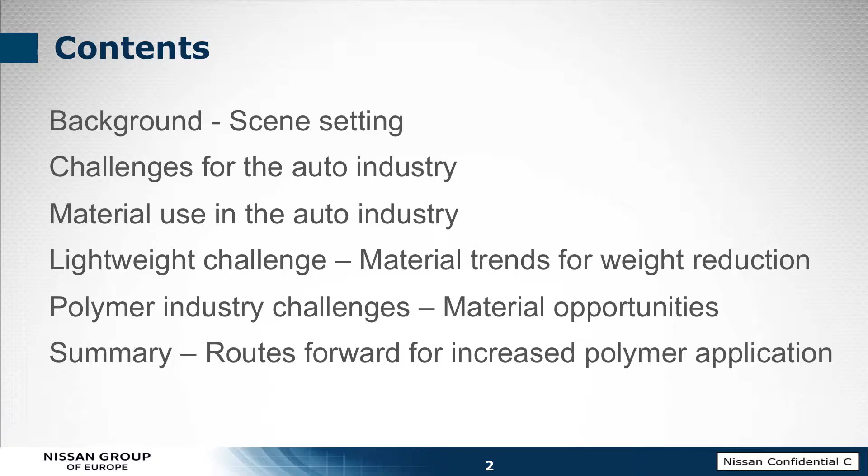The main focus of the presentation will be how we can work together, what are the challenges for the polymer industry, and what opportunities there are to work together. And then as a final summary, a little bit of crystal ball gazing and predictions as to where we may be moving to and what the opportunities are for increasing polymer application.

Now, a little scene setting. I don't want to go into too much detail over corporate strategy, but basically to keep my boss happy, just to give you a little feedback regarding Nissan and where we are. We're basically a global player now, and although we are Japanese in origin, our business is all around the world, and we have production sites in most major countries around the world.

As probably most people are aware, we have a very strong partnership and alliance with Renault. This was founded back in 1999, and it's been one of the most successful in the automotive industry, indeed in all industries put together. We work very closely with our Renault colleagues, and I'll announce shortly we've expanded this alliance a little further, so we're hoping to follow the role model we put in place with the alliance and take it some steps further forwards. One of the biggest benefits from our activity is our combined purchasing function.

Similar to what Ian was saying about our purchasing strategy and direction, this is across 3 organizations now to get volume benefits and standardization of materials. This helps us drive out the cost of our product, but also benefits us at the end of life of the product for recycling, because we have more standard materials and the industry can assist us to recycle and reprocess those materials more easily.

So basically onto the challenges for the auto industry. What are the issues that's going to be facing us? Basically the changing use requirements - we're no longer car manufacturers, we're suppliers of personal mobility solutions. As Ian mentioned, there are a lot of changes with the customer base that we are going to be facing.

Connected car and autonomous drive is going to make huge differences.

One of the big challenges we're going to be facing in the future is the availability of energy and raw materials. We're already starting to see issues with energy price rises, shortages of certain materials. This is going to be a big challenge for us. We all need to be aware of that and to be able to plan and develop vehicles to take that into account.

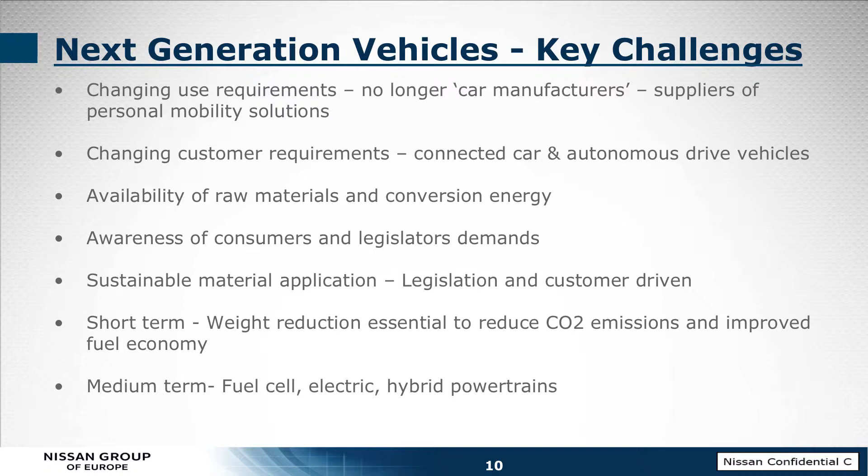Also, the requirements of our customers are considerably changing, and the legislators are applying more control over the auto industry. No doubt everyone is aware of Dieselgate and the complete swing in engine technology that's taken place over the last couple of years. But there's going to be even bigger changes.

In the short term, the main drive for us is taking the weight out of the vehicle, which I'll explain in a little bit more detail in the next couple of slides. In the medium term, it's the new powertrain systems that we're going to be applying, so fuel cell vehicles, hybrid and fully electric vehicles will be the big challenges that we're facing over the next few years.

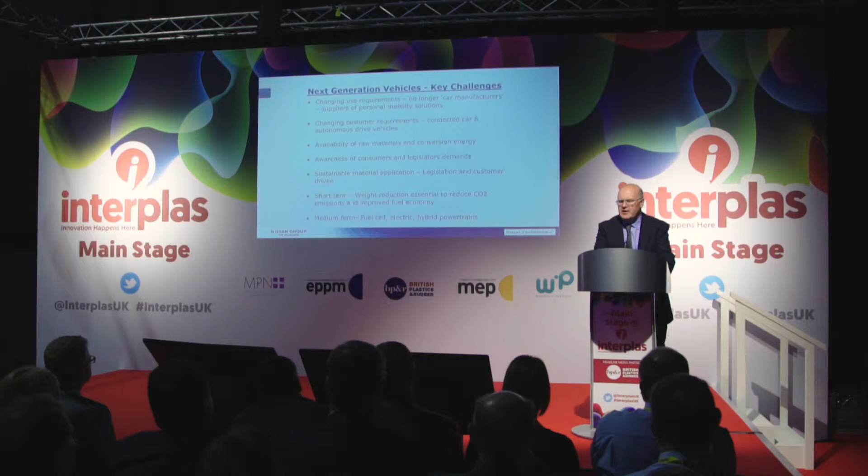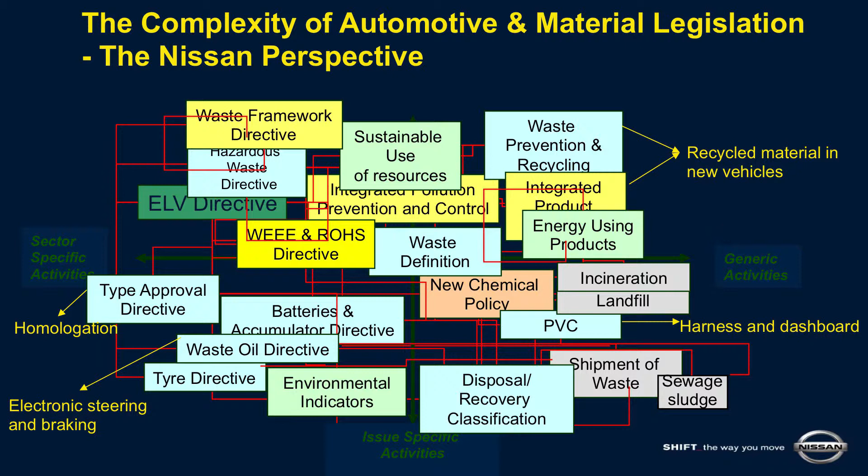I don't expect anyone to be able to read and comprehend that slide. It's purely to show you how complex the legislation is that we have to face together as the automotive and the polymer industry. We've got to meet all of these requirements to satisfy our customers and the legislators.

The big drive for us is basically the future tailpipe emission requirement, 95 grams per kilometre, 2020. That's not so far in future. Probably the vehicles that we're putting on the market now will still be on the market in 3 years' time. So the activities that's been driving the reduction in fuel consumption and emissions will still be there in place.

The direction we're taking is smaller engines, replacing a lot of the metal, consolidating parts, and basically moving to lighter weight solutions wherever possible and optimizing our vehicle.

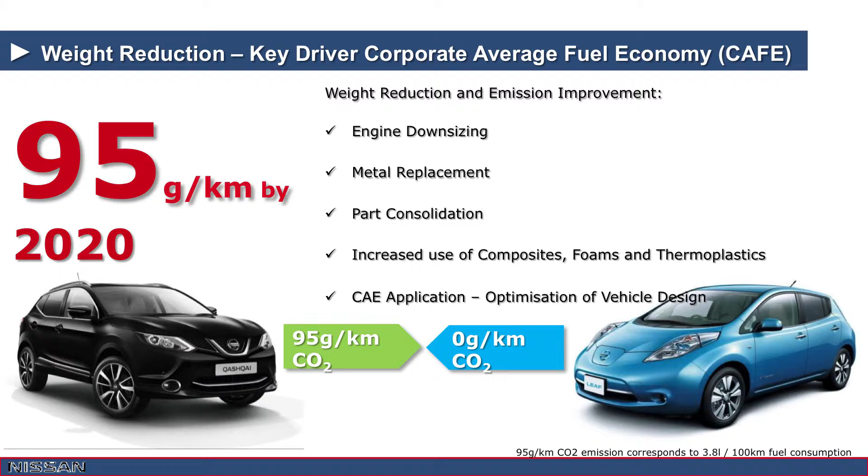Probably as you can see at the bottom of the slide, one of our Qashqai models just achieves the target. We then need a vehicle like the Leaf, which has zero emissions, to offset some of our more high performance luxury vehicles. Something like a GTR model is probably 3 times that level of emission. So we'd have to sell 3 or 4 Leafs to offset and bring that GTR down to the 95 level. So that's a huge challenge for Nissan, for the whole auto industry.

A little bit of bedside reading I would recommend for people is the Automotive Council's roadmap for the future. This maps out to 2040 the type of technologies we'll be looking at. I don't want to try and do the crystal ball gazing by myself. There are far more expert people in the industry who've contributed to that position paper, so definitely worth looking at.

Similar to what Ian said, the growth in the UK auto industry, there are very strong predictions for 25% growth over the next 3 to 4 years. So far from being a dead industry, it's a growth industry, one where everyone should be engaging and supporting.

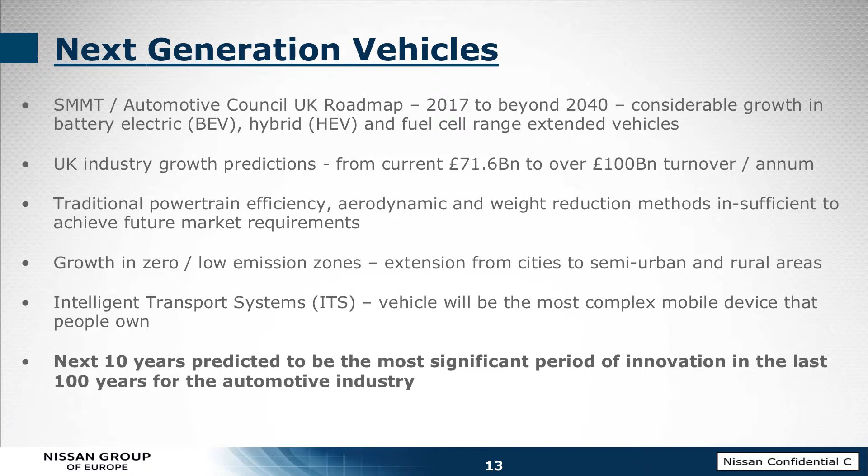In order to continue that growth, basically we need to get weight out of vehicles. We need to match the technology to our customer requirements. One of the big predictions is for the next 10 years, that will be the biggest period of innovation the auto industry has seen in the last 100 years. So the last 100 years, basically, we've seen a lot of changes. The next 10 years, huge amount more additional items.

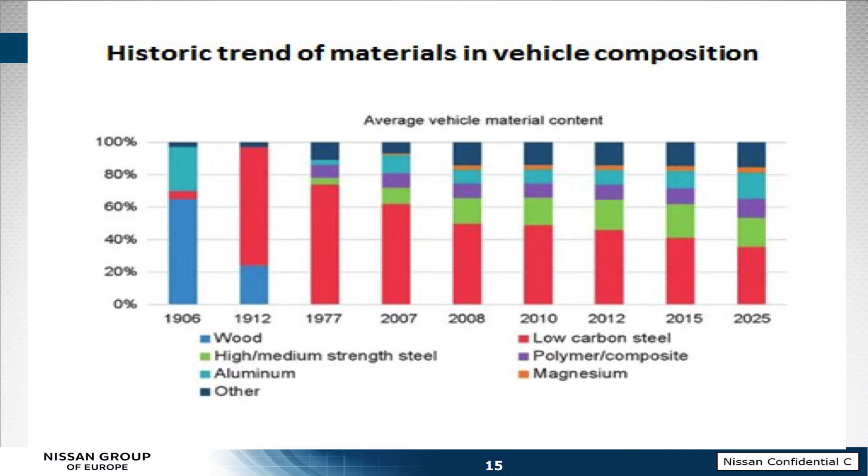Just to set a little bit of background of what materials we use, going back in history - 1900s, vehicles were essentially made out of wood, horseless carriages. As we've gone through to the 70s, a lot more steel appearing in the vehicle, basically low strength steels. Moving forwards, where we are today, there's still steel, a lot more high strength steel, a lot of aluminium alloys and metallic materials, but there is a consistent growth in polymer application.

We predict this will continue. So the polymer industry has opportunities there. The business opportunities are there for yourselves to exploit and work with us to deliver.

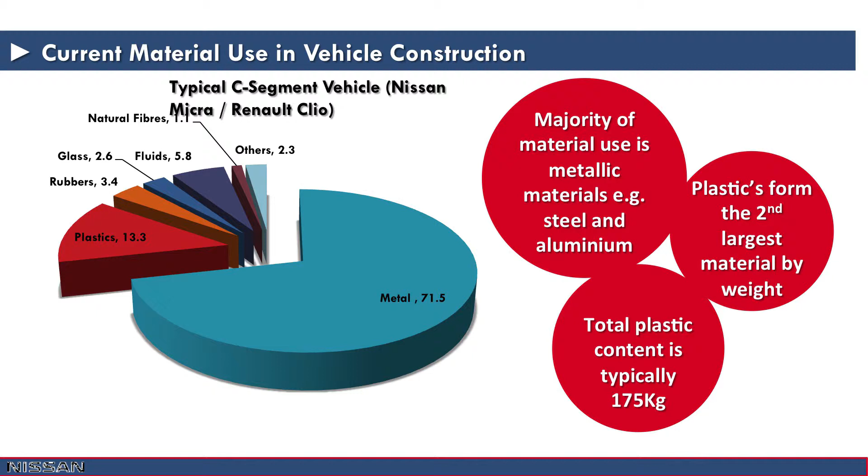We didn't compare any slides or information prior to this, so I'm relieved the figures are very similar. For a luxury model like one of JLR's and one of our more mass market products, about 70% of the vehicle is metallic in nature. The second highest proportion is plastic and elastomeric materials, typically of the order of 175 to 200 kilograms. So quite a big volume at the moment, and predicted to grow even further.

So where are we going for the future? What do we need to focus on? And what weight reduction technologies do we expect to dominate?

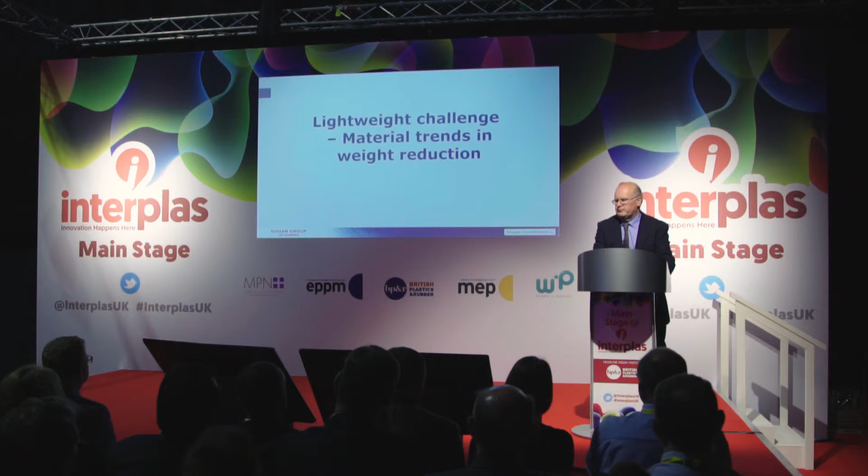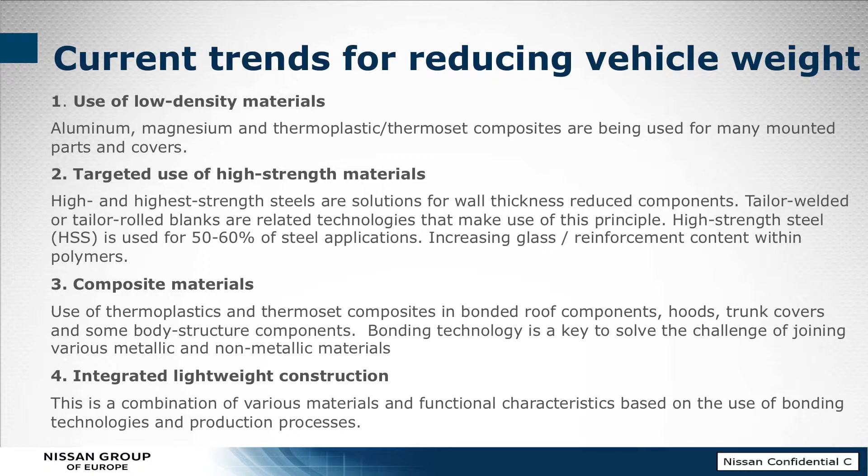Clearly the steel industry is going to fight back, as are the metallics. The aluminium industry is pushing very strongly, with more applications of lightweight aluminium for closure panels, things like bonnets and doors on vehicles. Higher strength materials are definitely a direction we're moving in for all types of materials. The steel industry has pushed ever higher strength grades. The polymer industry, we're expecting you to deliver the same technology leaps to give us better materials, higher filled levels, better strength properties.

Composites - it's been the buzzword probably for 20, 25 years. We're following the aerospace industry, trying to use composites where we can, but the technology isn't there yet for mass manufacture, mass production, and the cost level isn't there yet. But it's definitely a technology we are looking at very closely and looking to exploit.

One of the biggest drivers there is basically how you join composite panels to steel, to aluminium, because the vehicle of the future is going to be a mixture of different types of materials. And how you integrate these material combinations is going to be the secret for the success of future manufacturing and repair and use of the vehicle in the market.

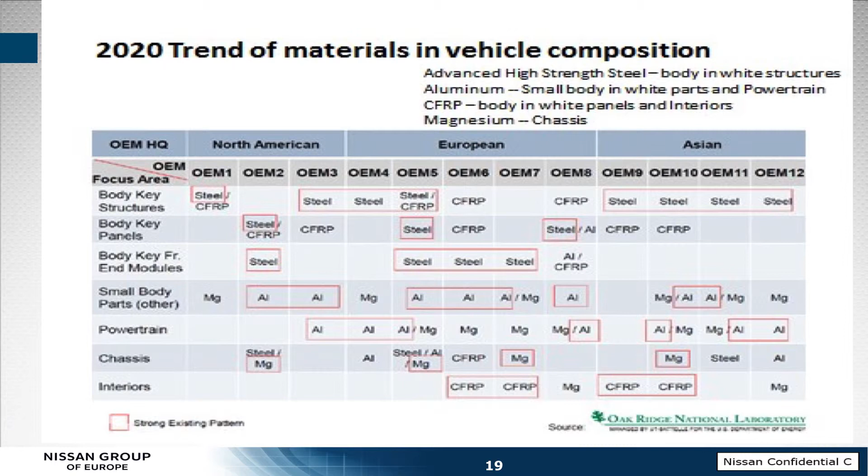Again, another slide I don't expect you to go into in a lot of detail, but it's just to highlight and contrast the differences between the Asian market, the North American market, and the European market. In Europe, there are many more material types that have been investigated and studied, and there's more opportunity here to try out different technologies, which is why we're pushing strongly many different areas of material application on our European products.

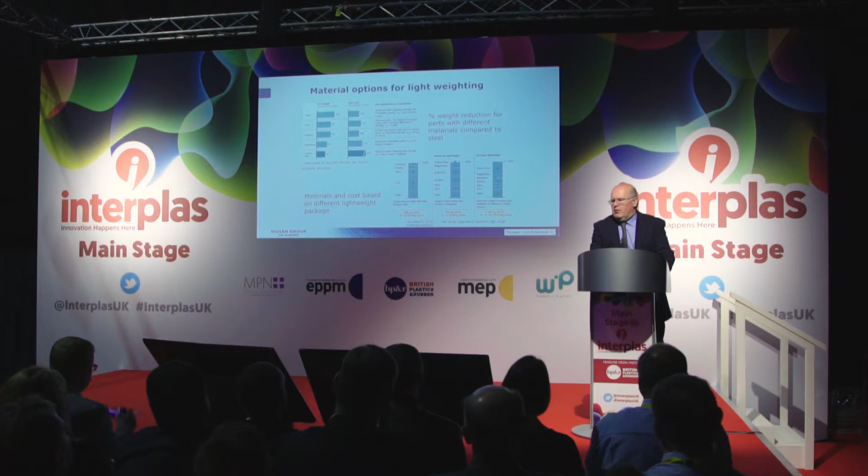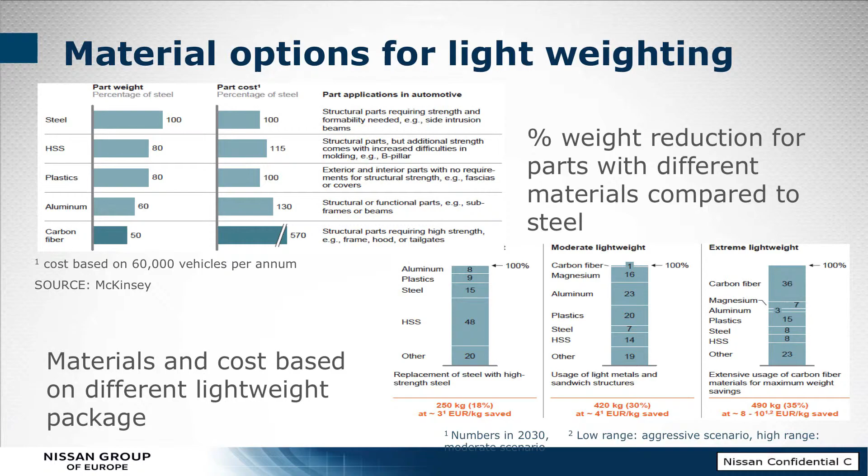Also, the type of applications of those materials and where we're applying them - for polymeric material and plastics, it's basically moved from basic interior trim parts to highly advanced engine components, crash members, crash products, and more challenges, and that's where we see the future moving. But what we need to achieve is the weight and the cost with these materials, and to be able to make everything into one lightweight package.

So what are the challenges for yourselves in the polymer industry? Where do you have an opportunity to contribute and support the OEMs for car manufacturing?

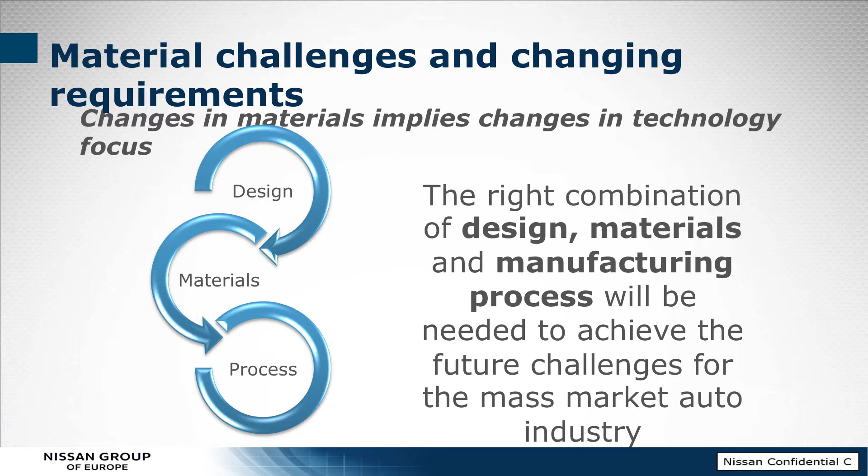Following on from a couple of the points that Ian made for JLR, we need to combine together the material, the design, and the processes. We've got to have the right material with the right design of part for the right application, and to suit our manufacturing processes. The only way we can do that is if we all work together to develop the new technologies, the new applications. The door is always open. We need to start the communication and improve it from where we are at the moment to be able to push forward. The OEM can make several suggestions and pointers, but it's everyone working together that will push the technology.

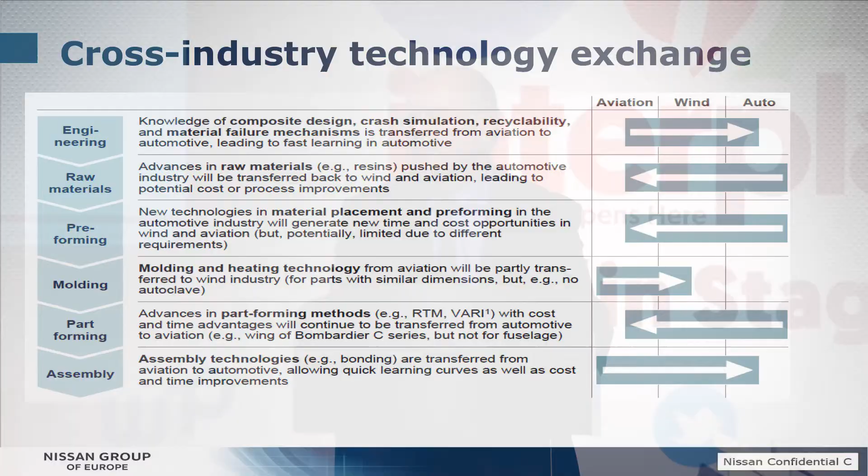Again, quite a complex slide - it'll be in a takeaway package that you can pick up from the organisers, so don't focus too much attention at the moment. But historically, there's been a lot of cross-fertilization of materials technology from different industries.

Aviation was historically one of the pioneers, but now we're finding many things coming from wind technology, from wind turbines. Their development of composite materials from automotive to wind could well be one of the directions to get into the auto industry. Similarly, for some of the forming activities, the auto industry, because of our production volume, has historically led, but this can be applied across other industries as well.

So don't just look at what you provide for the auto industry - look at what can be transferred from other industries. Even packaging material is widely used in many of our components to standardize and make mass manufacture more suitable.

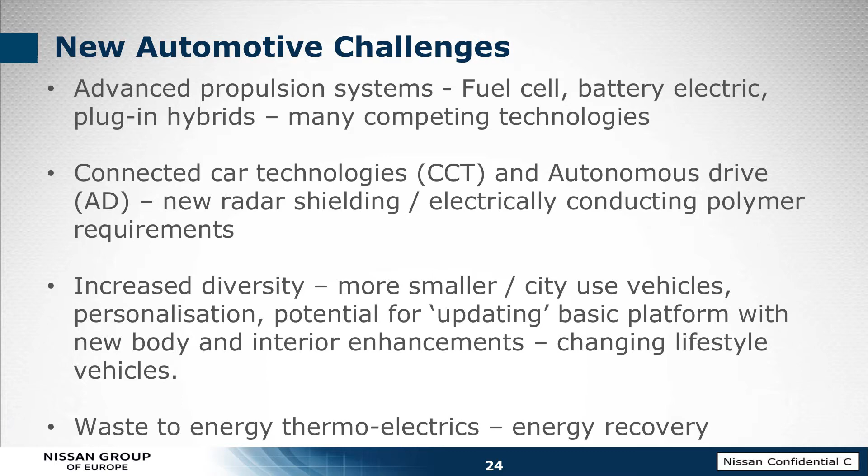As we've already spoken about this morning, the new propulsion systems will make a lot of changes to our industry - fuel cell vehicles, battery electric, plug-in hybrids. There are many competing technologies, and I don't think anyone has one perfect solution. Some technologies will be like a Betamax video recorder, dropped and forgotten, while others will go forward like CDs taking over from old technology. To find those winning technologies and combinations, we need to push together.

We've already spoken a little this morning about different technologies, and autonomous drive is one of the bigger issues. That has huge requirements for materials, both from radar shielding and electrically conductive polymers. So there will be new technology requirements that will be required.

Also, the diversity of the products is going to be a big challenge. The customers want increased personalization. Nobody wants the standard vehicle that the next door neighbour's got anymore. They want a different vehicle for a different day of the week.

So one of the things I'm looking at is lifestyle vehicles and how to adapt and change a vehicle platform to suit how a person goes through their life cycle, from being a teenager just starting to drive through to being a more mature adult requiring easier access, entry and egress in the vehicle. So we need to have that at the forefront of our mind.

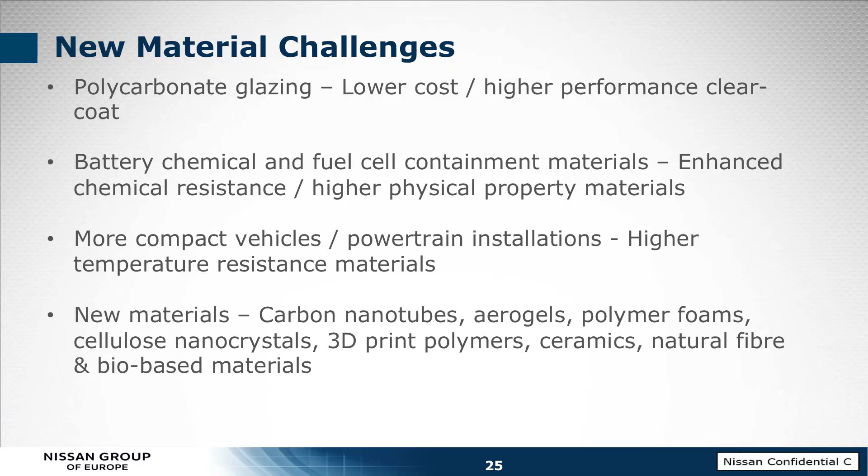Specifically for the plastics industry, polycarbonate glazing is one area that, medium term, we see as a great opportunity, eliminating glass from the vehicle. But we need to work together to reduce the cost of this material, particularly the clear coating technology and its manufacturing process. There are opportunities there for vast amounts of material on the vehicle.

Also for the new powertrains, for fuel cells, chemical resistance and physical properties at higher temperature are very, very important. And there are many new technologies that will be competing - things like carbon nanotubes, some polymer foams and aerogels appearing on the market. 3D printing we see as being a big opportunity, and a lot of natural fibre and bio-based materials. So there will be many competitors in the future.

So as a quick summary of my activities - I know I've gone through this very, very quickly - we need to balance the legislation and the customer requirements. CO2 reduction is a huge activity we need to progress. ELV recycling and recyclability is an issue.

Thermoset composites - this is a huge concern for us. Using these multi-material combinations that are very likely, we need to bear in mind we need to separate these materials to be able to recycle and recover them.

Taking the weight out of the vehicle is essential, and we need to look at all opportunities for weight reduction in order to get down to the 95 grams and then the future requirements. 60 grams is already being talked about. It's not going to be that far in the future.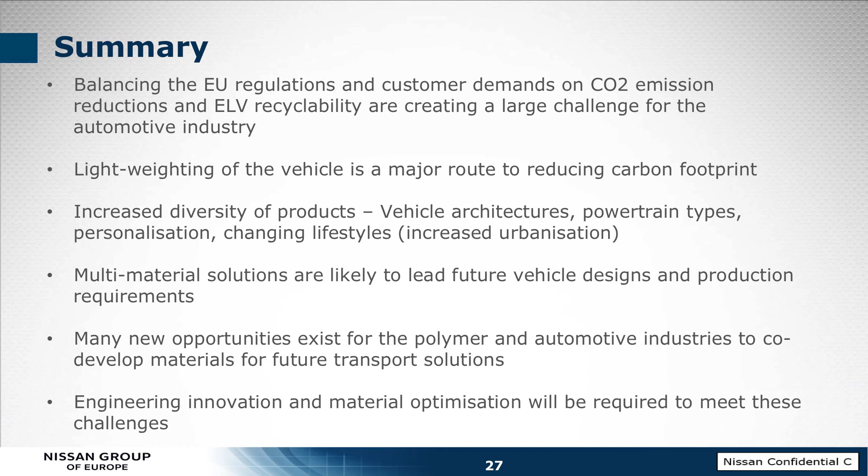Multi-materials, as I keep harking on about, is definitely an area where we are pushing very, very strongly - things like adhesive bonding, riveting, alternative joining technologies, and alternative material welding technologies are things that we're looking at.

So there are huge opportunities, as we've heard this morning already from JLR and now from Nissan. The polymer industry in the UK can work very strongly with us. We can work together to make huge benefits, and the opportunities are there. There will be a requirement for huge innovation. Optimization of materials will definitely be required, and only by working together can we deliver the future. So thank you for your attention.